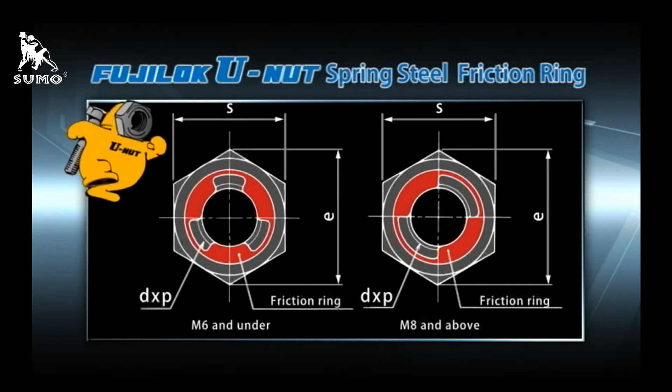Now, the basic specifications of the Fujilok U-Nut. On sizes M4 to M6, friction rings have a 60-degree 3-wing ring structure, while sizes M8 and above have a 90-degree 2-wing ring structure. Friction rings are integrated with the top face of the nut.

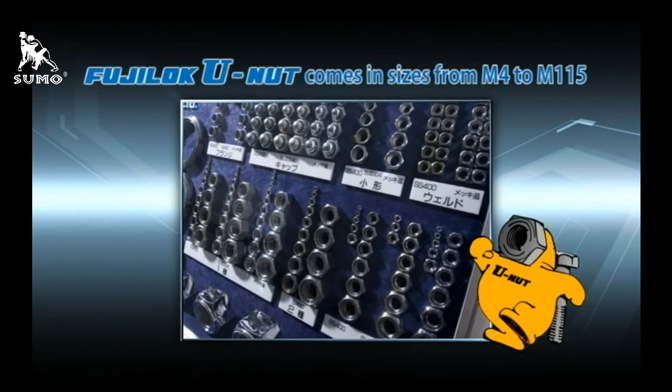A wide range of sizes is available, from small diameter M4 nuts to large diameter M115 nuts. In addition, thread accuracy conforms to the JIS 6H standard, and for the pitch, coarse thread as well as fine thread is available.

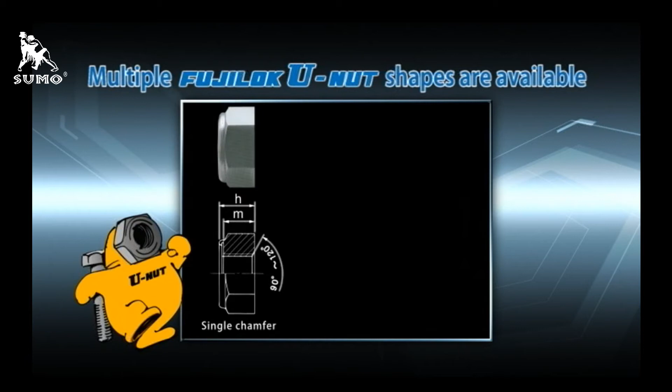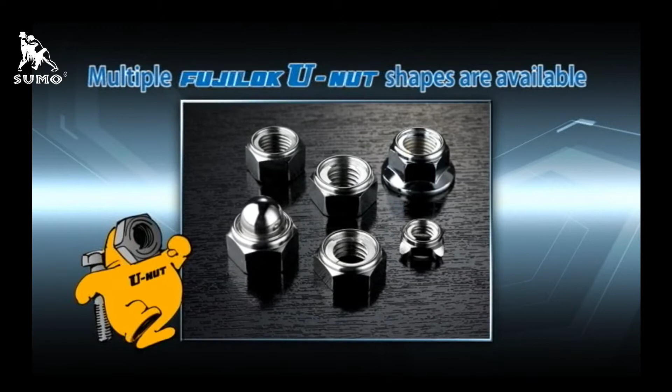Various shapes such as Type 1 single chamfer nuts, Type 2 double chamfer nuts, and Type 3 thin type nuts are available, as well as small nuts, flange nuts, domed nuts, weld nuts, and other specially shaped nuts.

The Fujilok U-Nut is also produced in a wide range of materials, such as low-carbon steel and heat-treated high-carbon steel, for conformity with all manner of bolts. Various surface treatments are available as well, in accordance with the customer's intended use and specifications.

Now let's look at experimental data that shows the excellent performance of the Fujilok U-Nut.

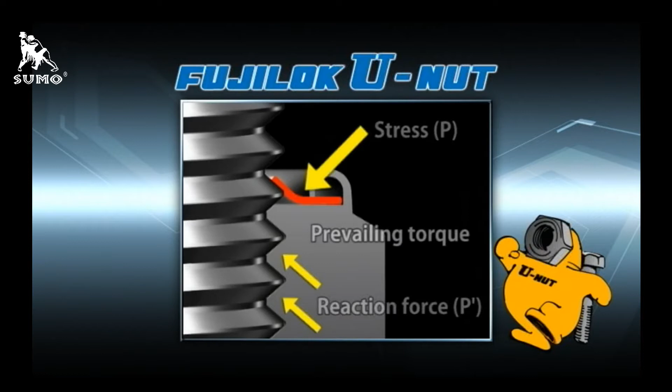First, we'll measure the frictional torque, called the prevailing torque, that is produced by the Fujilok U-Nut friction ring strongly placing stress against the bolt screw threads through a spring effect. As shown in this graph, prevailing torque increases as the nominal diameter of the nut increases.

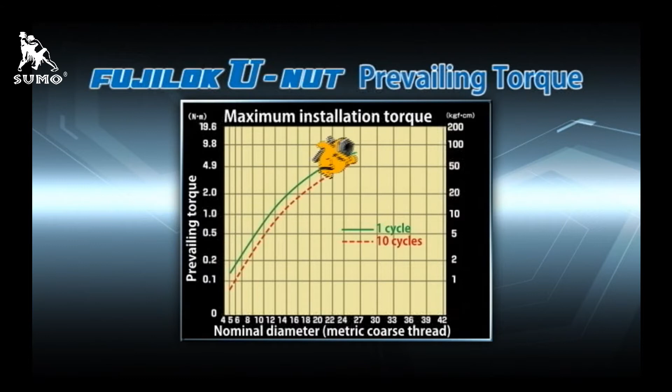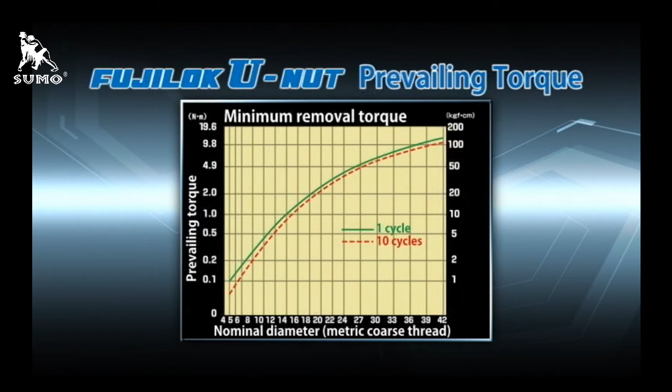Even if nut removal and installation are repeated for 10 cycles, the prevailing torque is hardly reduced. By looking at this, you can see how free rotation is prevented through stable prevailing torque and how the Fujilok U-Nut can withstand repeated use.

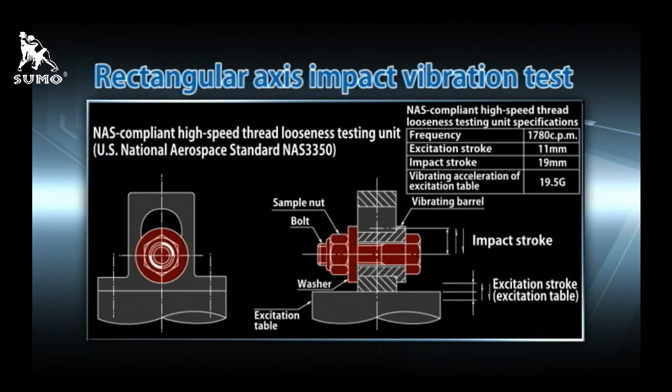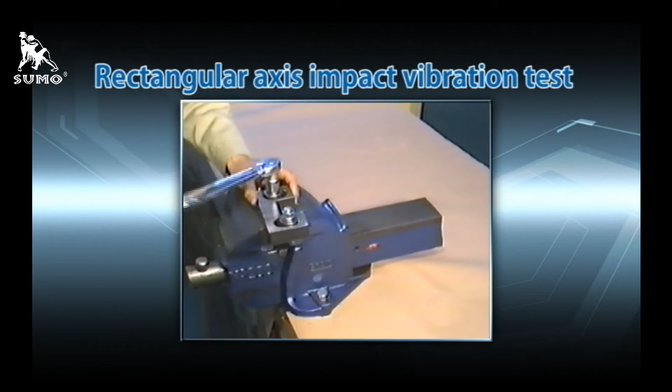Next, let's look at an actual test video to really understand the quality of the Fujilok U-Nut's locking function. To achieve stable test conditions, a preset type torque wrench is used, and the nuts and bolts are set on a vibrating barrel.

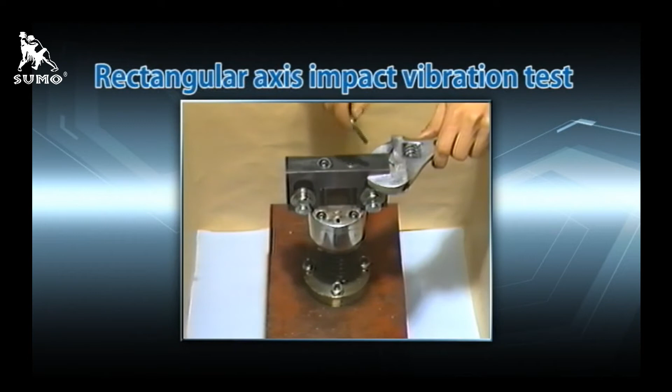In this test, ordinary nuts with spring washers, double nuts, and Fuji-Lock U-Nuts are compared. An impact vertical to the bolt axis direction is repeatedly applied to the nuts and bolts tightened in the vibrating barrel. The locking performance is then determined by looking for looseness and seeing which nuts stayed locked the longest.

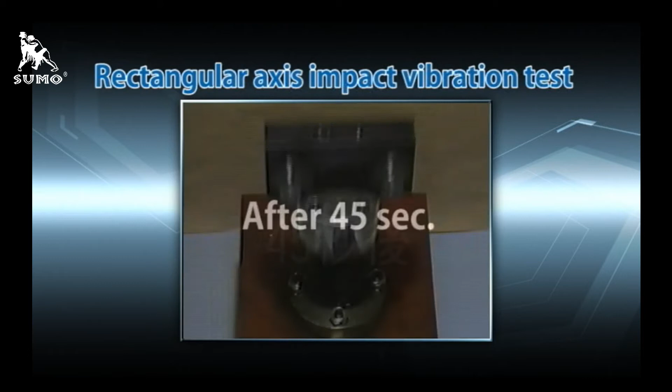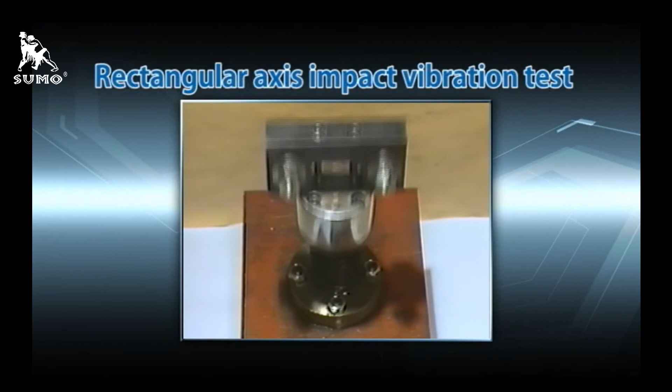After 45 seconds, the ordinary nuts with spring washers have come off. After 2 minutes and 30 seconds, the double nuts have come off.

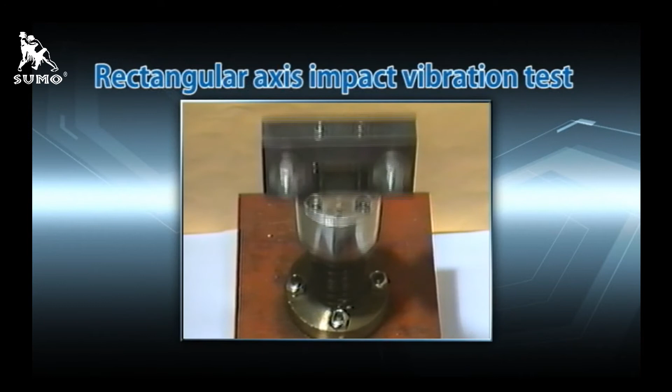In comparison, the Fuji-Lock U-Nuts are still okay after 10 minutes. The test results show that the Fuji-Lock U-Nuts maintain the locking effect even after 16 minutes.

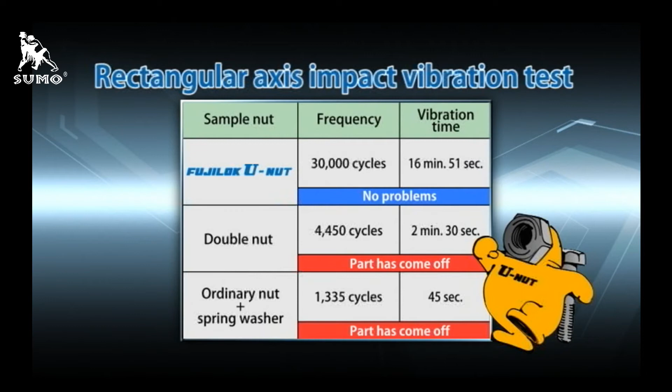As you can see, the excellent locking performance of the Fujilok U-Nut can also be verified with a vibration test. It's definitely the best!

Installation of the Fujilok U-Nut is easy. Check that the tip of the thread portion of the bolt has a chamfer that is equivalent to 1 pitch. Use lubricant in cases where problems such as scorching or seizing may occur.

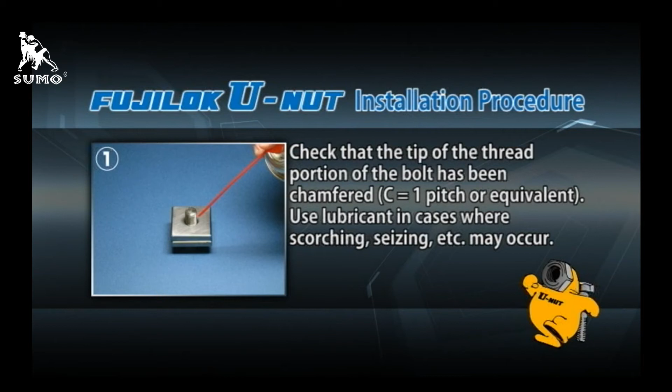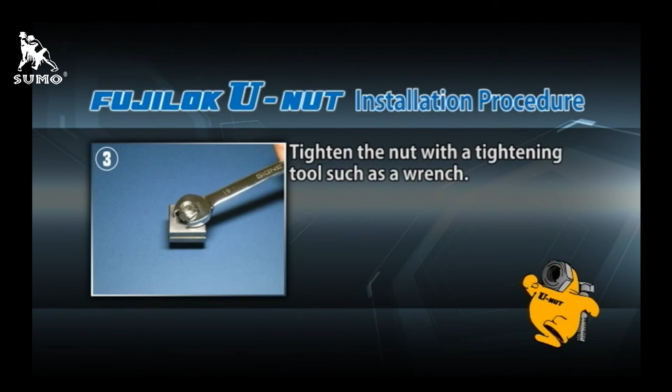Manually screw the nut on until the friction ring touches the tip of the threaded portion of the bolt. Tighten the nut with a tightening tool such as a wrench. Check that at least 2 full bolt threads protrude beyond the friction ring.

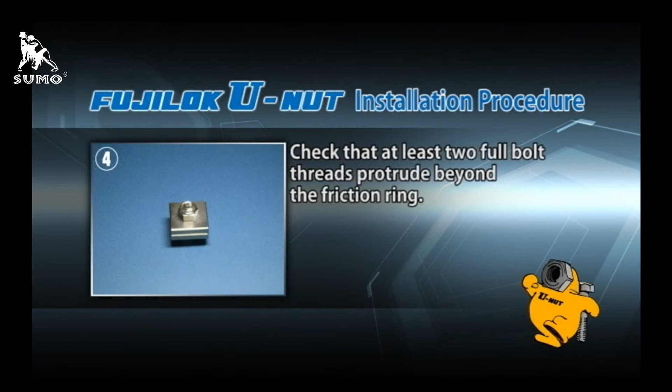Lastly, we will review the precautions for using the Fujilok U-Nut. When fastening, refer to the tightening torque table for the appropriate torque to use.

Use bolts with a chamfered tip with a JIS 6g thread accuracy. Use lubricant in cases where problems such as scorching or seizing may occur during installation or removal of a nut.

For full locking, ensure that 2 full bolt threads protrude beyond the friction ring at the top of the Fujilok U-Nut.

When welding a nut, pay attention to the effect of heat and spatter on the friction ring and thread areas. Consult with Fuji Seimitsu before using the nut if the bolt thread is machined with keyways or pinholes.